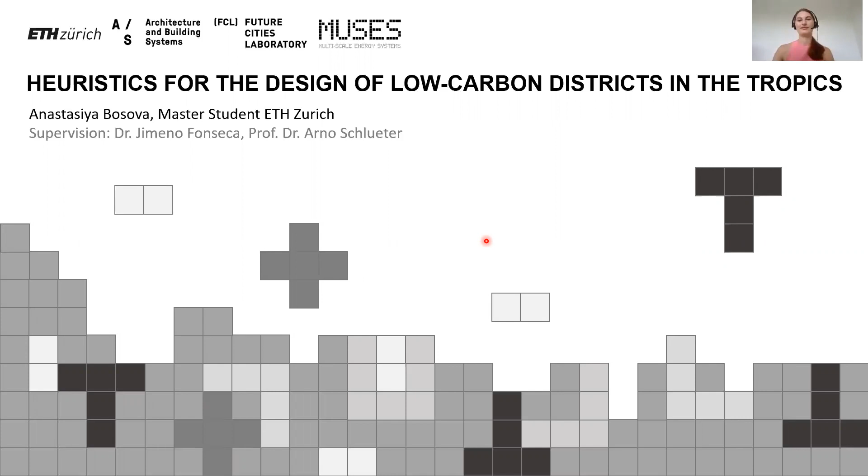In the next 30 to 40 minutes, I will give you a brief introduction into the topic. Then I will address the most important findings of the literature review that helped develop the methodology of the project. Next, I will talk about the methodology of the study, and finally I will show the results, and of course conclude and give an outlook. Afterwards we'll have a discussion and everyone is welcome to ask questions.

So let's begin. I couldn't resist starting with this picture recently shared by Professor Schlueter. He argued that probably a small percentage of the world's population will be affected by COVID, which has gained enormous attention from the global community. Certainly more people will be affected by the upcoming economic crisis, but all of us without exception will be affected by the negative impact of climate change caused by anthropogenic greenhouse gas emissions.

Cities play a big role here. Cities are estimated to cause over 70% of global carbon emissions, and the building sector is responsible for more than half of those. More than 50% of the world's population already lives in cities today, and this percentage is expected to grow to more than 70% in 30 years, with particular growth occurring in the cooling-dominated regions of Asia, such as Singapore.

You can see Singapore in this picture. This is the city center, but actually I can't be sure that this is Singapore because it's the third month of lockdown, but we can assume that.

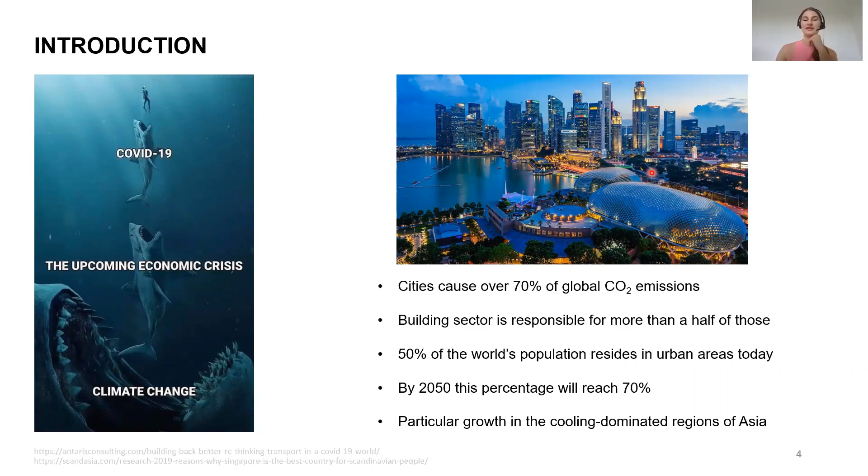So there is a clear challenge of mitigating climate change and sustaining the needs of a growing population at the same time. This is impossible without low-carbon solutions in the building sector, which would aim to reduce its energy use. Despite this emerging need for planning low-carbon cities, urban practitioners are still experiencing a lack of low-carbon design guidelines.

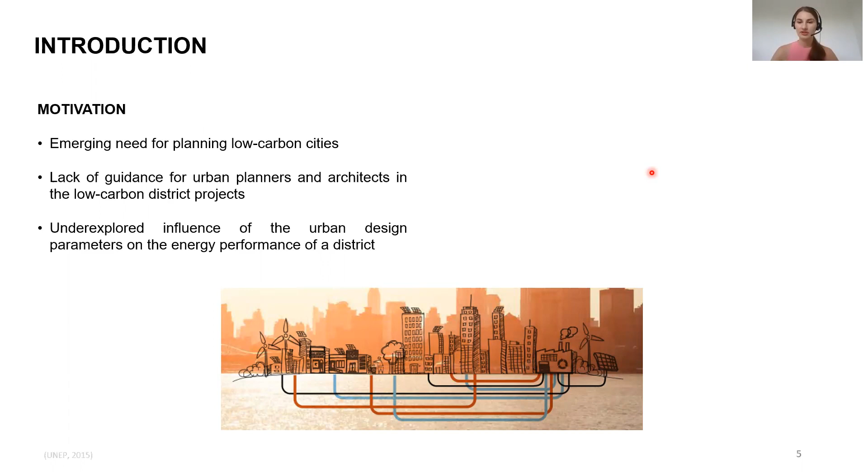It has been argued by various researchers that it would be helpful for urban planners and architects to have guidance at the neighborhood level, or district scale as I will later call it, on which design parameters can potentially influence the energy performance of the urban area. However, the influence of urban design parameters on district energy performance is not sufficiently explored and quantified to come up with comprehensive guidelines.

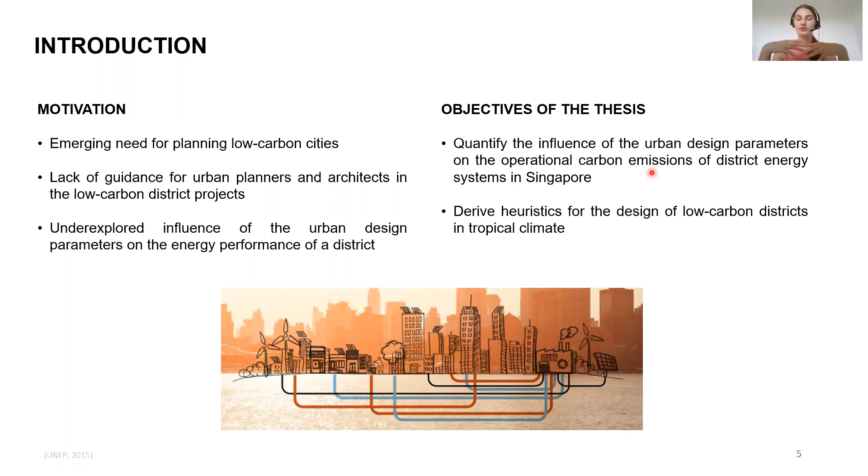So this thesis attempts to fill this knowledge gap by quantifying the influence of urban design parameters on district energy systems in Singapore, more specifically the influence on the operational carbon emissions of the district energy systems. Based on this, the final goal is to derive heuristics, or shortcuts, that would help urban practitioners design low-carbon districts in tropical climates.

So the first step of the thesis was to conduct a literature review. It had two goals. The first goal was to study existing low-carbon or low-energy urban design guidelines, and the second goal was to review energy-driven urban design studies, which explored the interdependence between urban design parameters and energy performance.

Regarding low-carbon urban design guidelines, only a few sources were found, mostly related to China or India. They would introduce general low-carbon strategies such as deployment of renewable energy, use of highly efficient appliances, and so on. So it was rather a vague conceptual level, and it didn't provide clarification on how urban design parameters influence the energy performance of an urban area.

Moreover, urban form was only considered as a factor influencing CO2 emissions associated with the transport sector. There was a concept of transit-oriented development introduced, which recommends concentrating density around transit stations to reduce overall commute. So to conclude, the lack of low-carbon urban design guidelines could be confirmed in the first part of the literature review.

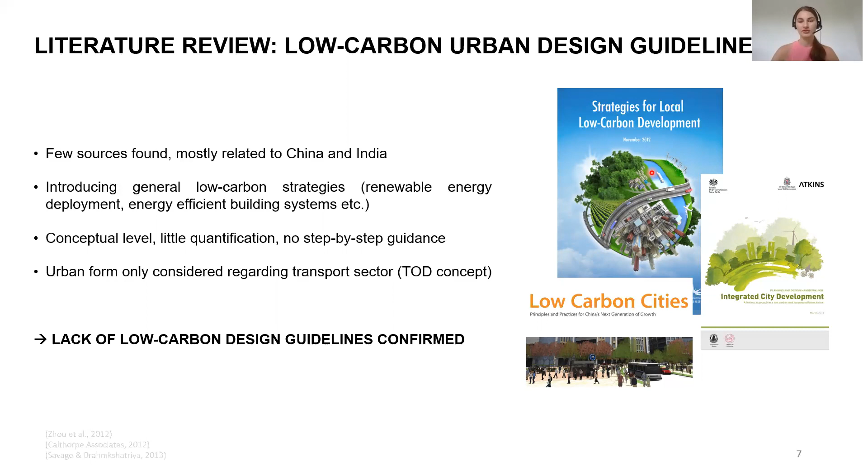The second part of the literature review studied the concepts of energy-driven urban design. Its main approach is to consider interdependencies between energy systems and urban form in order to achieve higher energy performance. A recent paper reviewed 50 energy-driven urban design studies and found design parameters that show higher correlation with energy performance of the building than other parameters.

These include typological parameters such as floor area ratio, orientation, and site coverage, and urban design parameters such as street width and building height.

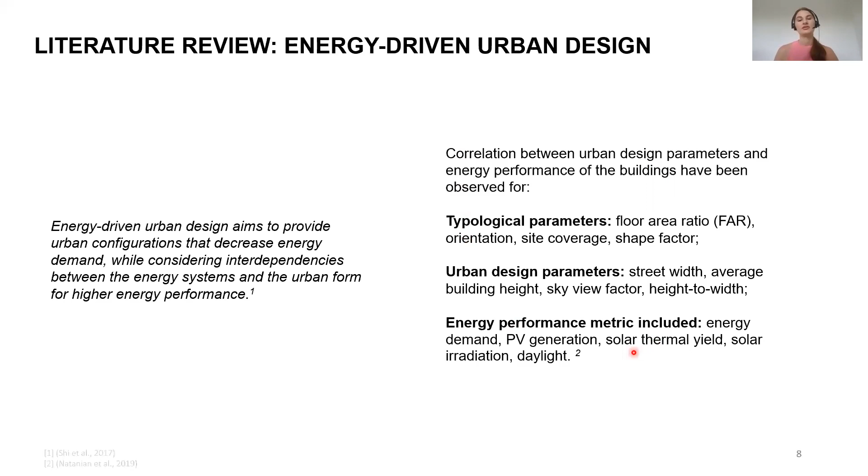These correlations were found for energy performance metrics that comprised energy demand and various solar potential indicators, such as total PV generation or solar radiation on building envelope. So not to be confused, I would like to briefly introduce some of the parameters we're going to talk about a lot today.

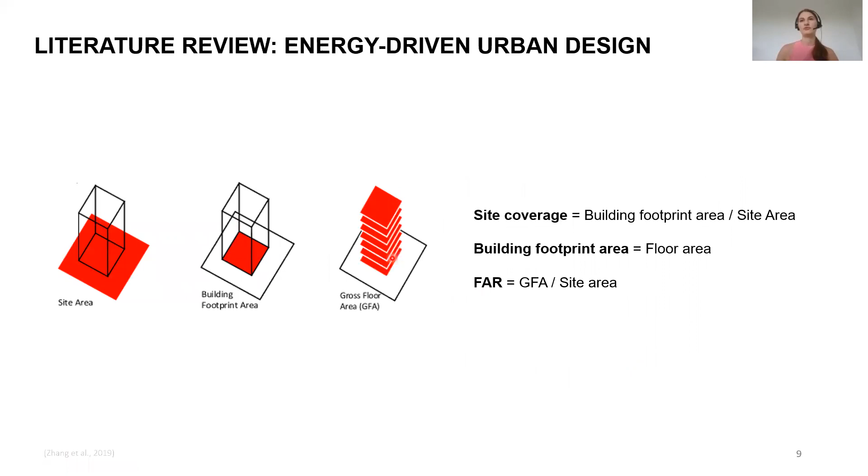These are site coverage, which is the ratio between building footprint area and site area; building footprint area, which is actually equivalent to the floor area; and so-called FAR, floor area ratio, which is a ratio between gross floor area of the building and site area.

So let's move forward to the typological-based energy-driven urban design studies. Often these studies use typological methods to represent and classify urban form. Three types of this method can be distinguished. The simplest one is generic building patterns with repetitive context.

Simply generic forms are used, as you can see in this picture. Target building is the one whose performance is analyzed, and context serves as surroundings to this building. This method, however, struggles to represent the actual built form because it is overly simplified.

The second method uses actual built form of the studied urban area by, for example, exploring GIS data of a city, and this requires big computational effort. Finally, the third method uses hybrid targets with repetitive contexts. Hybrid targets can be vernacular typologies present in the studied area, and the context can be simplified with generic typologies. So this method is a good compromise between the two.

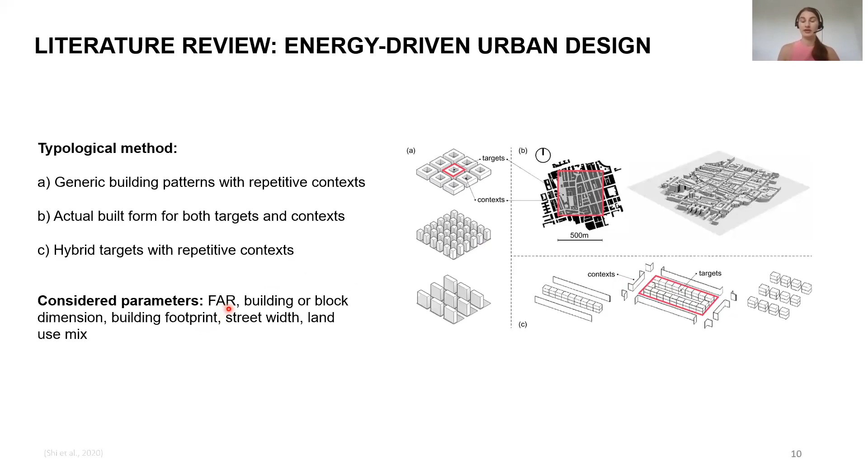In these studies, the design parameters used to describe urban form include floor area ratio, building or block dimensions, building footprint, street widths, and land use mix.

Here are some examples of the way researchers apply the typological method. On the left side, a Singapore-based study by my colleague Zhong Ming is presented. He used generic patterns as a starting point, then verified them for the Singaporean context and came up with various block typologies relevant for Singapore. For example, a block would comprise a combination of podium with a tower. The aim of the study was to estimate PV potential of each block typology.

On the right side, a study is shown that is also based in tropical climate, but in China. These typologies were retrieved by studying urban form of the city of Macau, including courtyard, pedestal, cross, and so on. The result of this study was to prove that one of the typologies, set back, maximizes solar accessibility, and also pedestal, court, and triangle perform quite well.

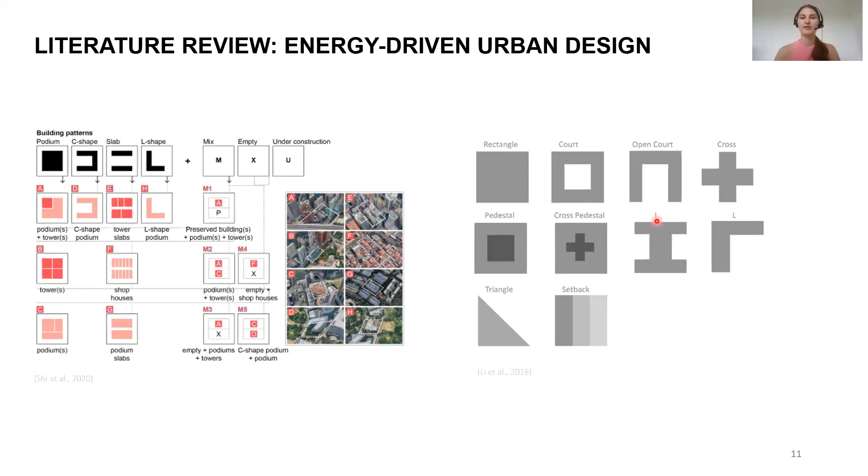These are the final studies that I would like to share with you. Some of the Singapore-based studies, not necessarily the ones using typological method, could actually quantify the relationship between studied urban design parameters and performance metric.

Here we can see what I mean by quantifying a relationship. It is to make a clear statement how a change of a design parameter would influence a performance metric. For example, to increase renewable energy share from 20 to 70%, FAR should decrease from 32 to 3 with purely residential land use.

Another example is here: hybrid and courtyard typologies have twice the rooftop PV potential, as well as twice higher reduction in CO2 emissions than other typologies used in this study, as shown here. These are examples of a good outcome one can expect to get out of energy-driven urban design studies in order to derive some heuristics. Hopefully we can hear something similar later in the results section.

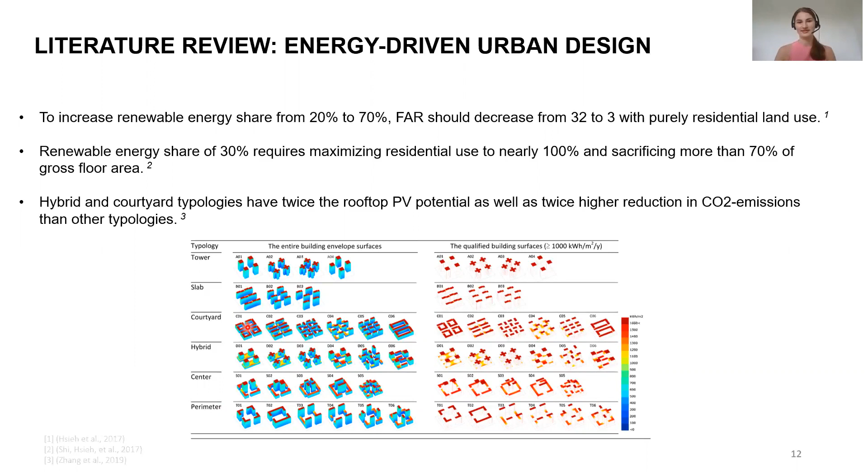Now that we have some background from the literature review, next I'd like to talk about the methodology of the current study. First of all, to describe urban form, a typological method was used. As block typologies lead to a large amount of design combinations, it is difficult to interpret the results, and sophisticated parametric tools are needed to generate the designs.

That's why this study chose building level as a typology unit, to gain more control over the modeling and interpretation of results. The building typologies from Macau shown earlier in the literature review were used as a starting point.

They were verified for the Singaporean context by studying building footprints in high-density areas of the city. As you can see, these typologies appeared to be present in Singapore, and 12 of them in total were adopted by this study, including square, courtyard, slab, C-shape, L-shape, and so on.

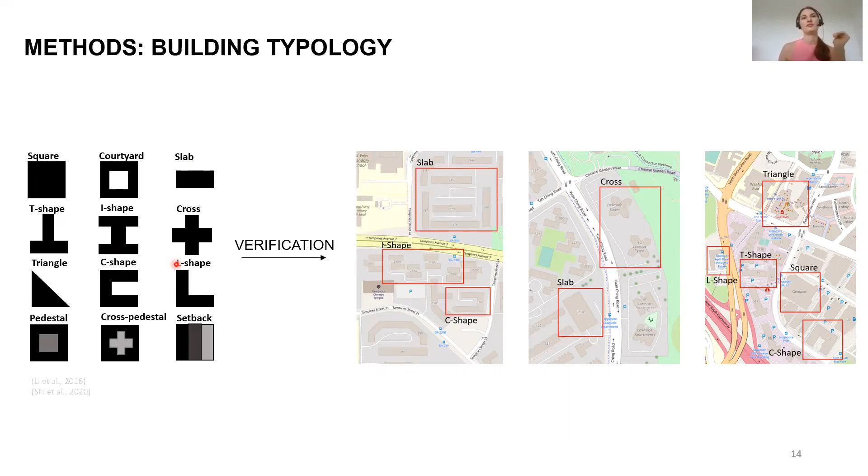To describe these typologies, the most relevant parameters in context of energy-driven urban design were chosen. According to the literature review, this includes density, expressed as floor area ratio, street width as a compactness indicator, and land use mix. The ranges for the parameters were defined based on the Singaporean context, and a mixed-use high-density setting was assumed.

There is a minimum FAR of 4 and maximum FAR of 24, 3 typical street width categories for Singapore, and 36 different land use mixes, including residential, office, and retail use. These land use mixes were grouped into 9 categories to simplify interpretation of results.

Given these parameters, a scenario parameter matrix was constructed, meaning that for every typology, each possible combination of design parameters was tested. For example, square typology was 60% residential use, 30% retail, 10% office, with FAR of 4 and street width of 15. The total number of scenarios reached more than 9,000.

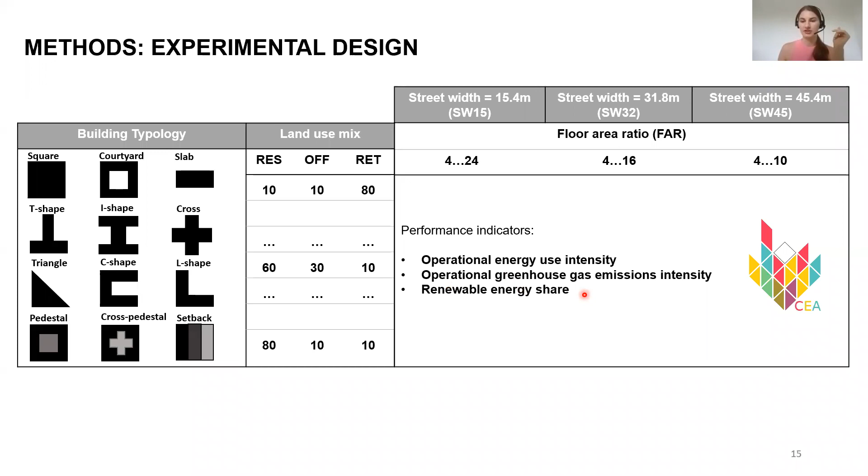The performance indicators for the scenarios included operational CO2 emissions, energy use, both absolute and relative values, and renewable energy share. As for supply systems, given the goal of low carbon performance, a constant set of well-performing technologies was chosen, including district cooling and photovoltaic panels installed on roofs and facades, with a threshold of 400 kilowatt hours per square meter per year. The rest of demand is assumed to be supplied from grid electricity, assuming the Singaporean mix.

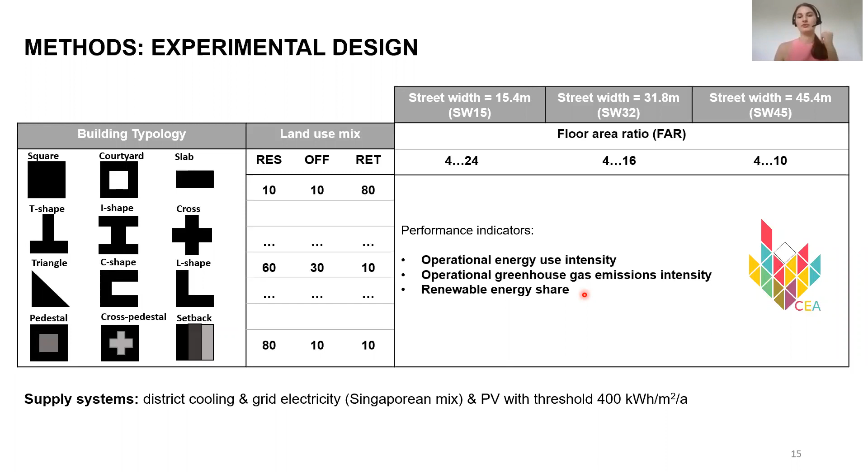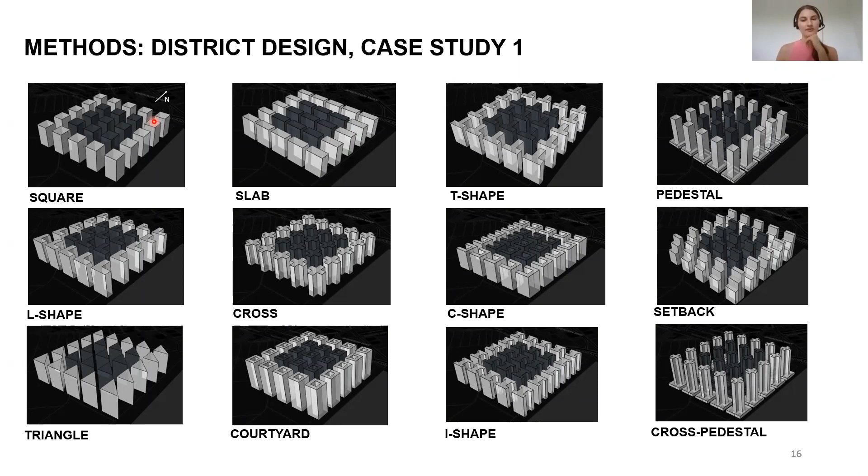The buildings are oriented to reduce solar exposure of the facade facing east-west direction, which is common practice in Singapore. Further, constant site coverage and site area were assumed: site coverage was 45% and site area of 100 by 100 meters.

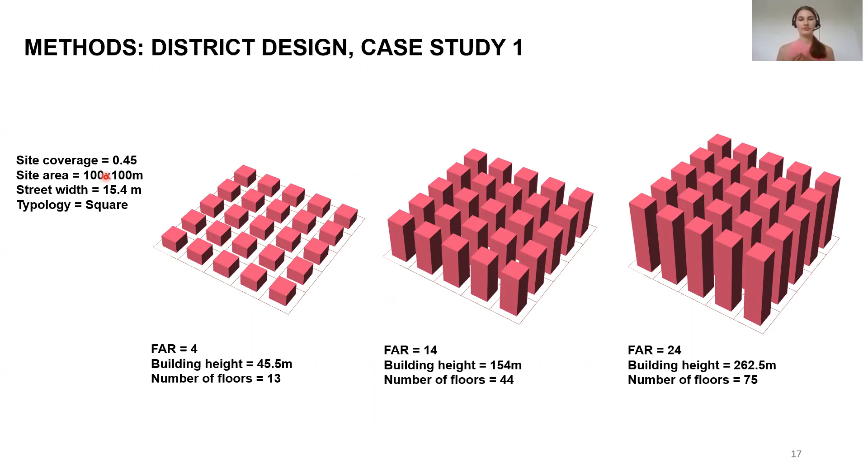If we keep street width constant but increase FAR from 4 to 14 to 24, given constant site coverage and constant site area, the building height should become larger. So the building grows, but footprint area stays the same. It is also assumed that the height profile of a district is homogeneous in this case study.

Next, if we keep FAR constant and increase street width under constant site area, the building footprint has to get smaller, and to achieve the same FAR with larger street widths, building height should also increase, which happens from left to right. In terms of compactness of urban form, a district with larger street widths would be less compact than one with smaller street widths, so street width in our case is an indicator of compactness.

Since larger street width means higher buildings, maximum achievable floor area ratio is different for street width of 45 compared to street width of 15, given a certain height limit. If maximum achievable FAR for street width 15 is 24, for street width 45 it is only 10.

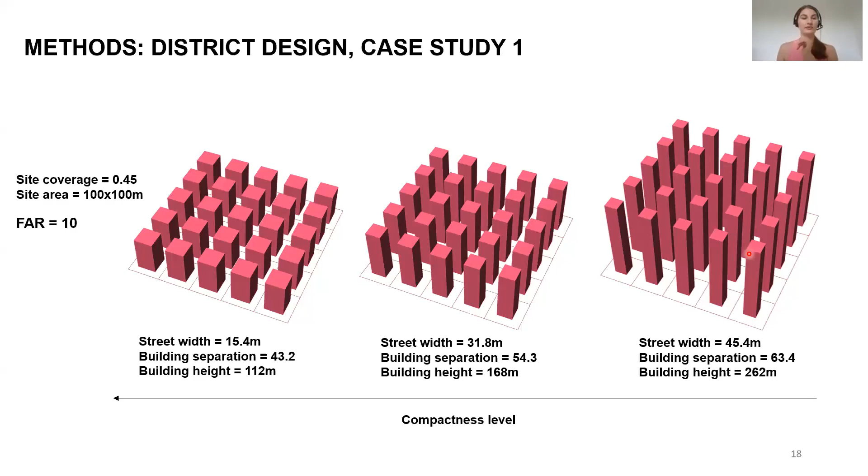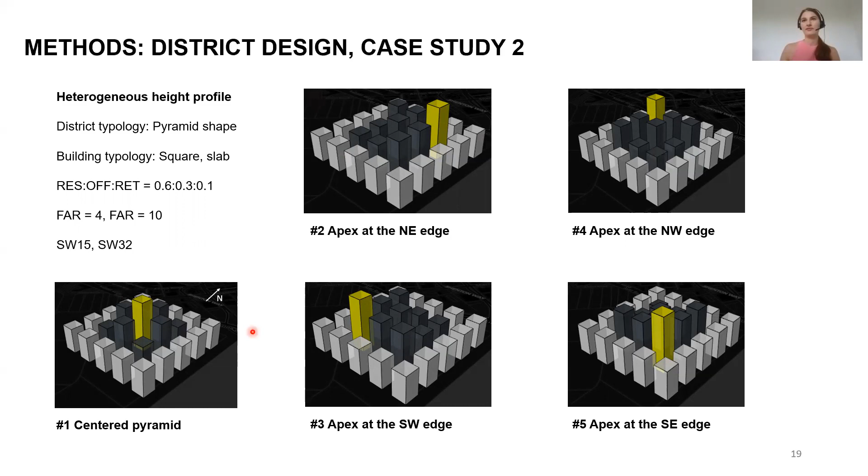The first 5 height profiles shown in this picture are inspired by the idea of transit-oriented development, which leads to a pyramid district shape with density concentrated at a certain location. The apex of the pyramid with the highest FAR can be located either in the center or at the edge of the district, giving 5 designs with different orientations.

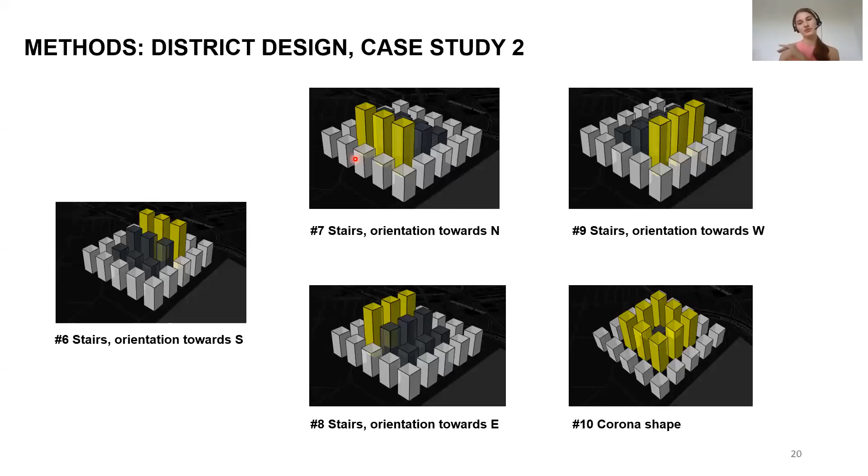Additionally, height profiles such as stairs and corona shape that have been used previously in the literature were explored. Stairs shape can be used in urban design to maximize views on one side of the district, for example if it faces a river or sea. Corona shape contains a smaller building at the center of the district surrounded by higher buildings, which can occur if the building in the center has a different use, such as a restaurant or school. The surroundings in this case study were assumed to be of homogeneous heights for all district designs.

In the final case study, the assumption of constant site coverage was challenged. Except for 45% site coverage, additionally 70% and 90% site coverage were investigated.

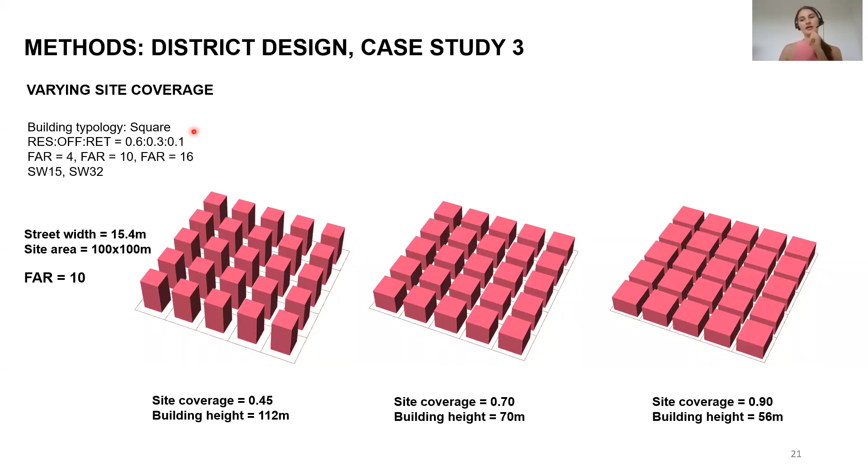Also here, a reduced number of scenarios was considered. A single typology of square was tested, 3 densities from 4 to 16, 2 street widths, and a single land use, same as in the previous case study. So the total number of scenarios reached 18.

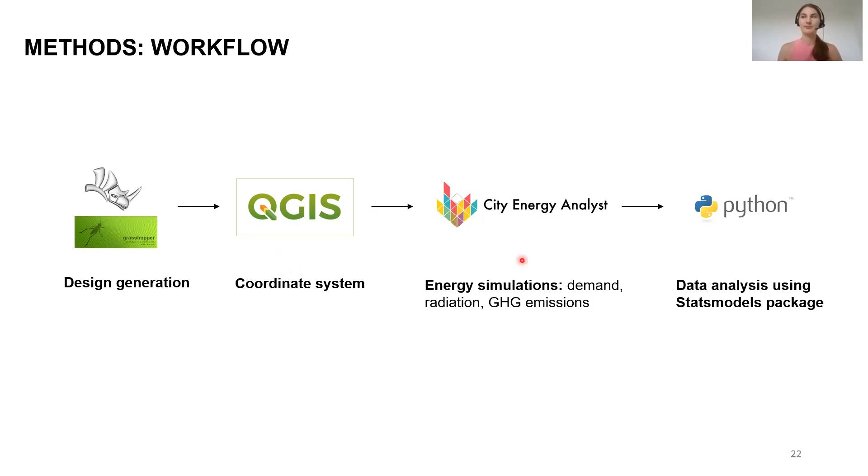To obtain the results, the following workflow with various tools was created. District typologies were generated in Rhinoceros with help of Grasshopper, then enriched by coordinate system in QGIS. Energy simulations were conducted with help of City Energy Analyst, and finally statistical analysis of data was done with the Statsmodels package in Python.

As for the statistical analysis, first ANOVA technique was used, analysis of variance. It is a hypothesis test that helps explore the relationship between factor variables and performance indicators. In our case, a factor variable is building typology, consisting of levels such as square, slab, and so on. One-way ANOVA helps determine whether the average CO2 performance differs for at least one typology among all considered levels. The null hypothesis, meaning that means of levels are equal, is rejected if the p-value is smaller than 0.05.

Two-way ANOVA additionally studies interactions between two factor variables, for example the interaction of typology and FAR with respect to energy use intensity. Let's say for one typology, an increase of FAR would mean lower energy use intensity, and for another typology, higher. Then the null hypothesis would be rejected by two-way ANOVA.

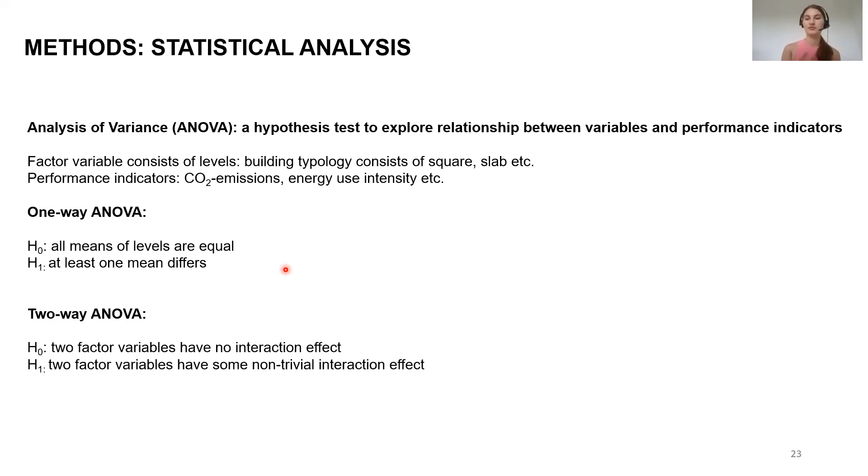Next statistical analysis technique was linear regression. It was used to approximate and quantify the relationship between input variables and performance indicators. A regression model of linear form was used, where typology, FAR, and so on are independent variables, and the aim is to estimate the unknown coefficients in order to predict performance indicators based on the input variables.

The estimated coefficients can be interpreted relative to a baseline scenario. For example, regression coefficients can be used to estimate the effect of an increase in the proportion of retail area on the carbon performance of the district relative to the baseline.

And now we're finally coming to the results section. To get a big overview, let's start with one-way ANOVA. I'm going to address each input variable - land use mix, typology, FAR, and street widths - considering various performance indicators. The results I'm sharing will be filtered for maximum FAR of 10 to use an equal number of observations for each street width category. Also, some typologies such as pedestal, cross pedestal, and setback will be excluded since they follow different logic in terms of maximum achievable density for each street category.

So let's start with land use mix and energy use. The null hypothesis is rejected for both absolute and relative energy use, meaning there is substantial variability in results for different land use mixes. We can see that land use mixes with a retail component have the highest energy use, while residential-dominated uses have the lowest, as expected. Balanced scenarios offer a good compromise between these extreme cases. If we consider the Singaporean standard for super low energy buildings and take the benchmark value for offices of 114 kilowatt hours per square meter per year, none of the scenarios with office use would satisfy this benchmark.

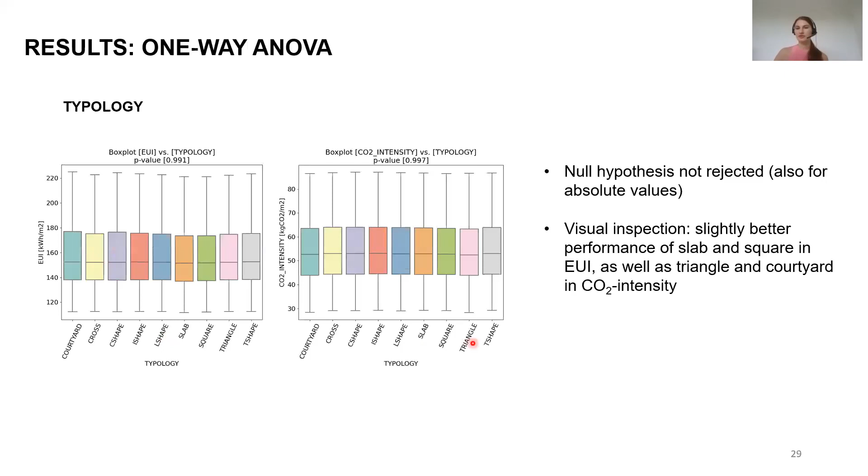Next, let's look at typology. For energy use intensity and CO2 intensity, the null hypothesis was not rejected, meaning there is no substantial variability between different typologies - this was also true for absolute values of these indicators. However, by visual inspection, we can see slightly better performance of slab and square in energy use intensity, as well as triangle and courtyard in CO2 intensity. Only for renewable energy share and PV potential was the null hypothesis rejected, suggesting inequality of means for different typologies. The highest PV potential and renewable energy share was reached for courtyard, triangle, and square.

On average, it was 9% of renewable energy share. This percentage is too low to create substantial PV-induced variability in other performance indicators. That's why we didn't see similar behavior of the CO2 performance.

If we consider FAR, as expected, the null hypothesis was rejected for energy use and energy use intensity. We observe increase of energy use with FAR, since the gross floor area also increases, and a light decrease of energy use intensity. Moreover, the step change is larger for smaller FAR.

If we look at the step change between 4 and 6, versus for bigger FAR, the step change between 8 and 10, I suppose the reason for it is increased mutual shading, because the ratio of shaded area is larger if buildings get higher with larger FAR. This decreases solar exposure of the facades and therefore cooling demand.

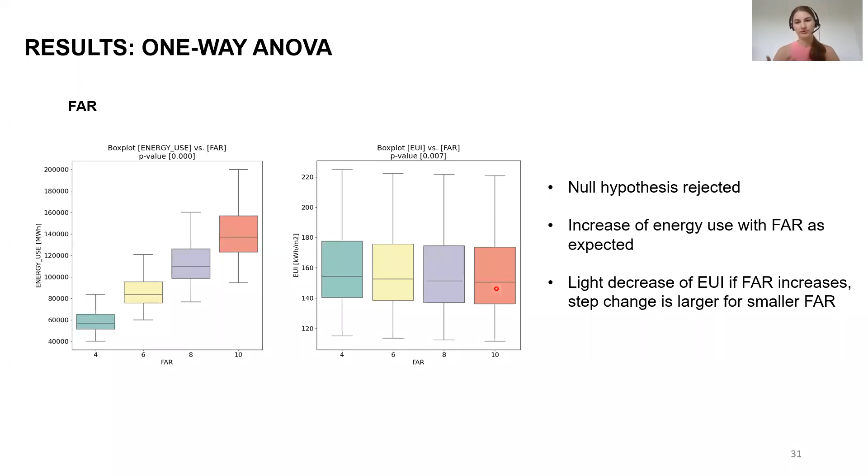The rate of change in renewable energy share is again not constant across different FAR, showing a larger decrease between 4 and 6 than between 8 and 10. Smaller PV potential for larger FAR also indicates that most likely the mutual shading is enhanced, so it decreases solar exposure of the facades and negatively affects PV potential on the facades, but reduces energy use.

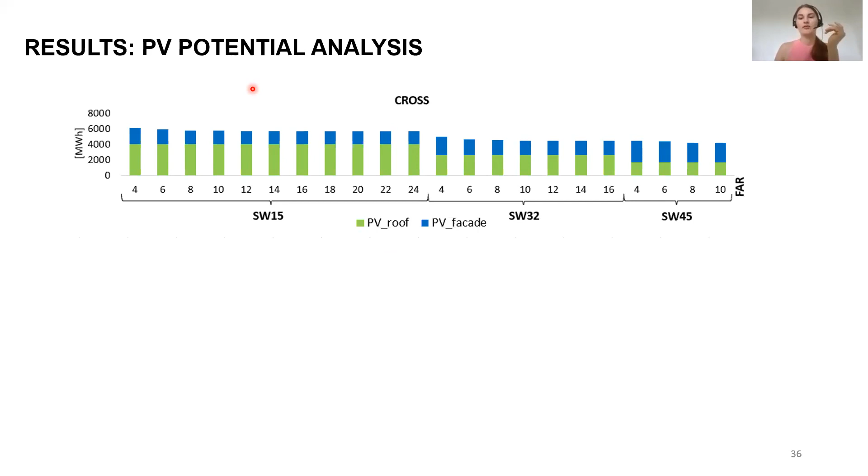Also, we notice that the roof potential is constant within a street category. Change in FAR only causes a change in facade production, which slightly decreases for bigger FAR. Roof potential is higher for smaller street widths, because footprint area and therefore roof area are larger. While roof potential decreases, facade potential grows for wider streets since mutual shading of the building reduces.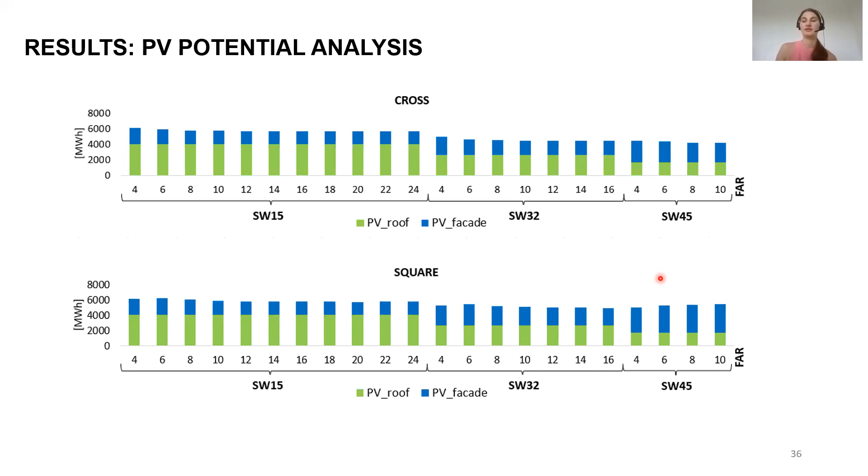If we compare the PV breakdown of cross and square typologies, we notice some differences for large street widths. In case of cross, facade production actually decreases with FAR, but rises in case of square. These kinds of occurrences are not captured by one-way ANOVA, so to address them, two-way ANOVA that considers two factors simultaneously should be used.

Here are the results of two-way ANOVA for PV potential versus typology grouped by street widths. The null hypothesis was rejected, suggesting an interaction effect between street widths and typologies. All typologies except for slab and square follow a similar pattern: wider street widths mean lower PV potential.

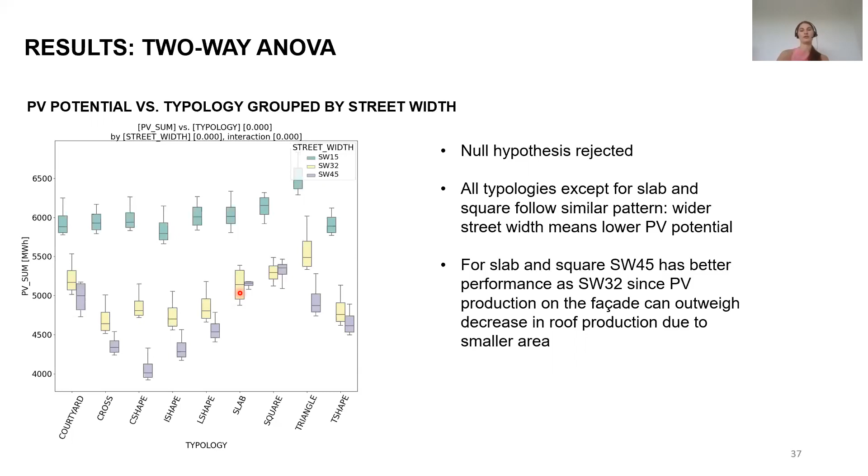But for slab and square, street width of 45 actually has better performance than street width of 32. Apparently, PV production on the facade for these typologies can outweigh the decrease in roof production due to smaller roof area. Two-way ANOVA was conducted for other cases as well, and the majority either didn't reject the null hypothesis or the trends shown in one-way ANOVA remain constant, so we will not address it further. Let's move forward.

In the previous analysis, we noticed that there exists very little variability of the performance indicators unless we talk about the influence of land use.

The variabilities arising from geometry-related parameters such as street widths or FAR would mostly be caused by differences in the PV potential.

So the question is, if we assume maximum existing PV cell efficiency of 45%, which is quite future-oriented and almost 3 times higher than the current cell efficiency, how will it change the results?

So we conclude that total PV production is still too small compared to energy use.

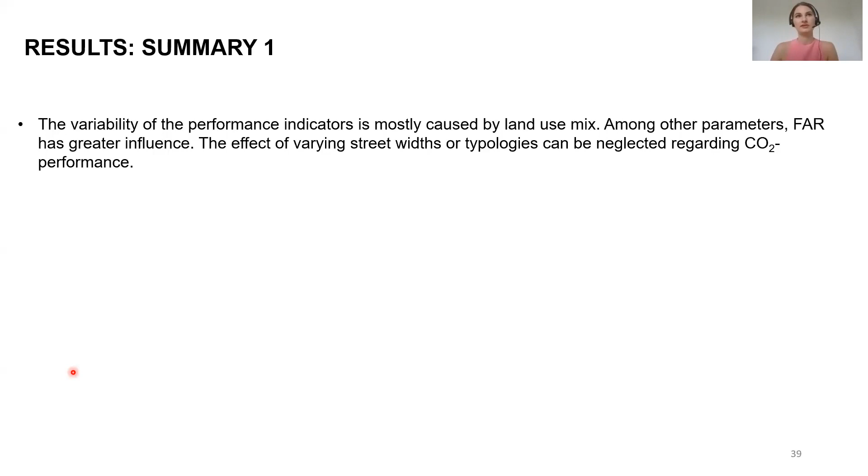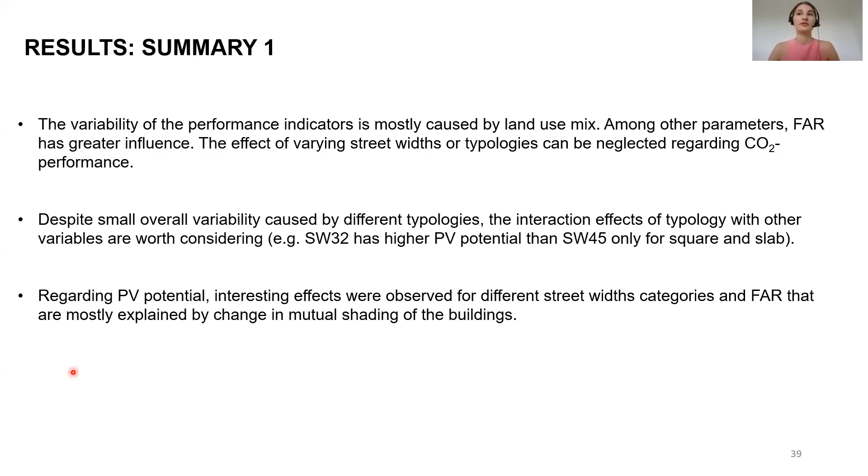Despite small overall variability caused by different typologies, the interaction effects of typologies with other variables are worth considering. For example, street width of 32 has higher PV potential than street width of 45, but only for square and slab. Regarding PV potential, interesting effects were observed for different street width categories and FAR that are mostly explained by change in mutual shading of the buildings.

Finally, PV potential and therefore renewable energy share are too small to project the variability of PV potential on the performance indicators. Even a triple increase of PV cell efficiency would reduce CO2 intensity only by 25%.

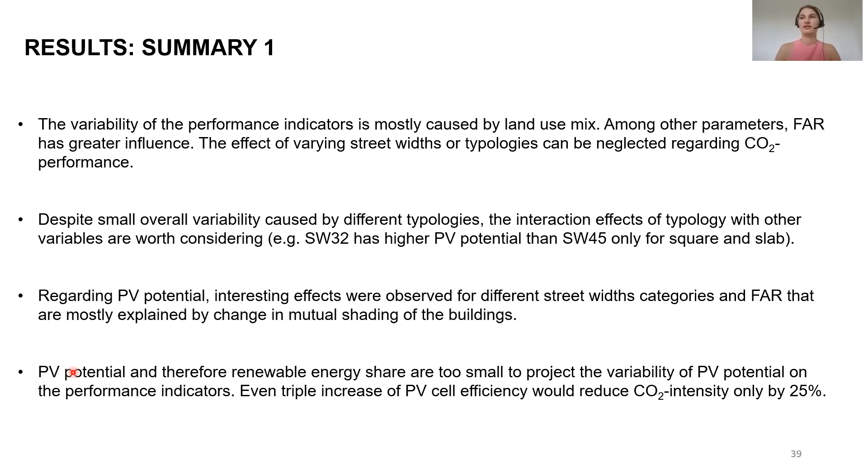Now I would like to share with you the outcome of the regression model, which is a table on the right that can be created for every performance indicator. In this case it represents CO2 intensity given the following baseline scenario: square typology, FAR of 4, street width 15, and balanced land use. We are mostly interested in these coefficients.

Coefficients with low standard error values and p-values close to 0 can be thought of as important and contributing to the explanatory power of the model, which is not the case for the typologies. The rest of the parameters have p-values of 0.

So I will give you an example of how this table can be read. If one wants to know how CO2 intensity would change if land use changes to office with residential and FAR is increased to 10, then it would be necessary to sum up coefficients with baseline. And this is the result that one would get.

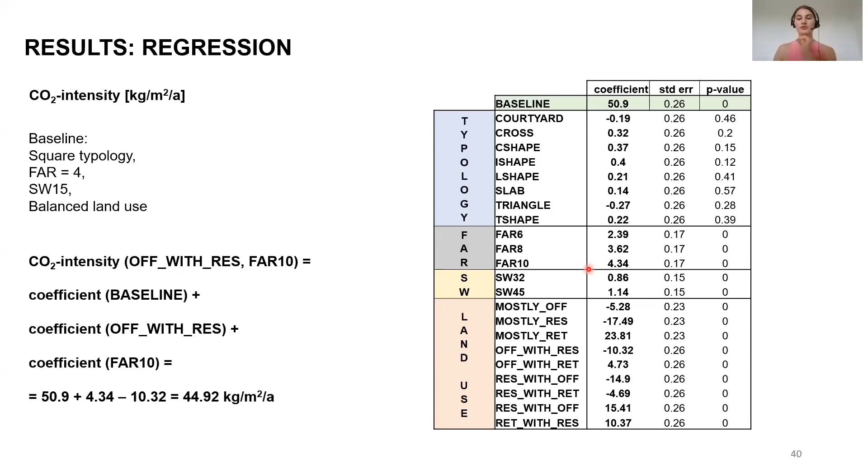Looking at the coefficients closer, one can spot some trends that we discussed previously, for example that the trade-off between FAR of 4 and 6 is larger than the trade-off between FAR 8 and 10. So both statistical approaches, ANOVA and regression, support each other's findings.

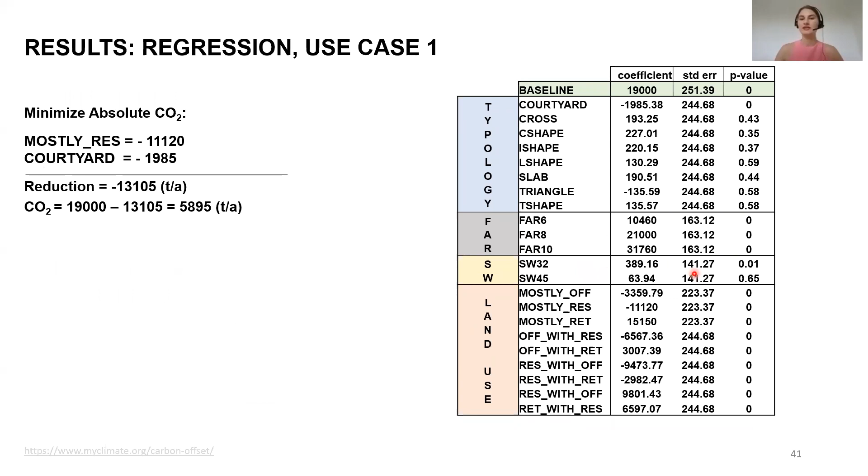Another example can be made with respect to absolute CO2 emissions. If the goal is to minimize CO2 emissions, then we should go for courtyard typology and mostly residential mix, resulting in a 13,000 ton reduction of CO2.

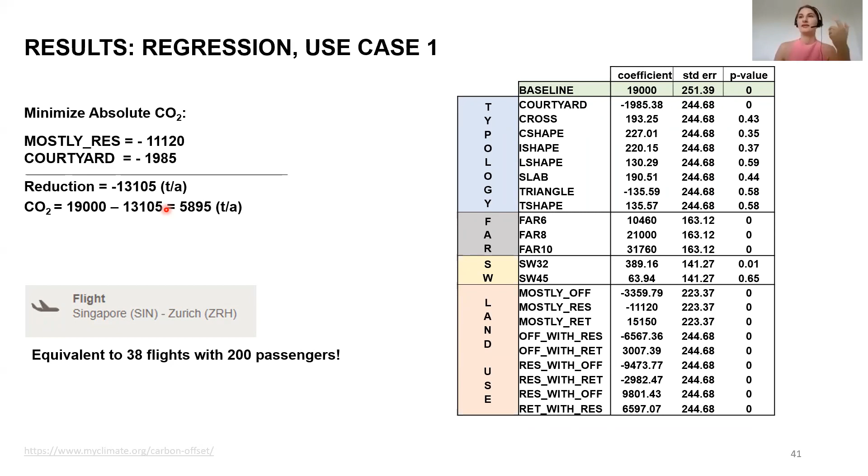To make this value tangible, let's compare it with something many of us have experienced, namely a flight from Singapore to Zurich. So 13,000 tons of CO2 would be equivalent to 38 one-way flights with 200 passengers. This is what we would save by such a design decision.

Also, these regression tables can be used for benchmarking purposes. For example, if one wants to minimize energy use intensity and achieve some good points from the construction authorities, then given the baseline, one could look at the possible reduction of the value.

And for example, in Singapore, the Building and Construction Authority says that you need to have 135 kilowatt hours per square meter to be in the top 10% of mixed development, so mixed land use mix.

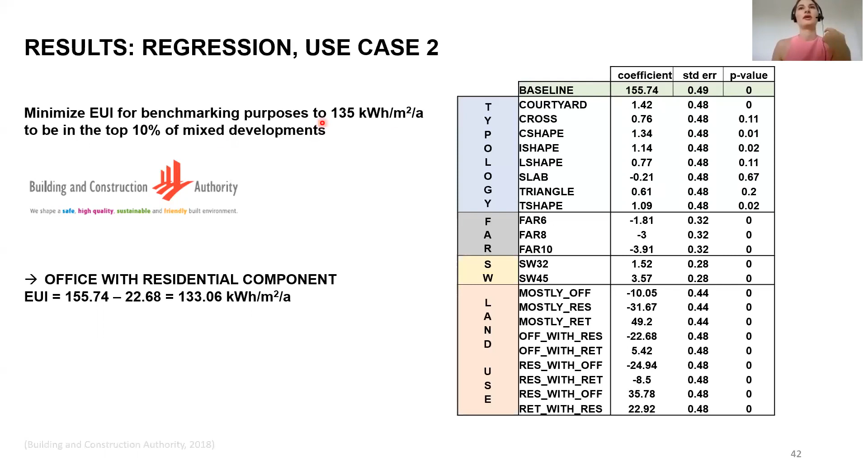To achieve that, we would need to introduce the office component compared to the baseline, and then the benchmark of 135 could be achieved. So let's summarize.

The regression model allows us to quantify the impact of parameter change on the performance indicator, and the trends analyzed with ANOVA are also present in the regression model. The findings are supported by both models. The regression model can be used for benchmarking purposes, to estimate performance of certain combinations of design parameters and compare different options, which is heuristics.

So the previous analysis was only for the first case study, exploring the scenario parameter matrix. But as you remember, there were also two case studies challenging the assumptions of the first case study. Case study two assumed a heterogeneous height profile of a district instead of homogeneous. And here are the results.

The null hypothesis was not rejected in all performance indicators except for PV, so there are no substantial differences between different height profiles. The energy use was also nearly identical in all cases.

However, some designs lead to higher PV potential, such as the stairs-oriented shape towards east and the corona shape, which are these box plots. They have larger PV potential on the facade, which is why the total PV potential is higher. So we can spot small differences in CO2 intensity for these height profiles too. They perform slightly better based on visual inspection.

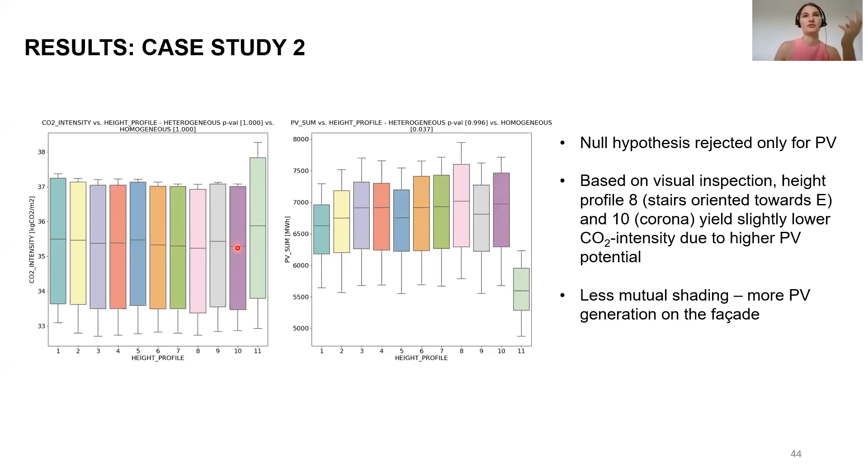As for the final case study with varying site coverage, ANOVA didn't reject the null hypothesis despite visual differences we can spot here. Perhaps it's due to the small number of observations, which is 18. So we noticed that higher site coverage leads to reduction of CO2 intensity because PV potential increases. The reason for that is an increase in roof area that is twice as big for 90% site coverage than for 45% site coverage.

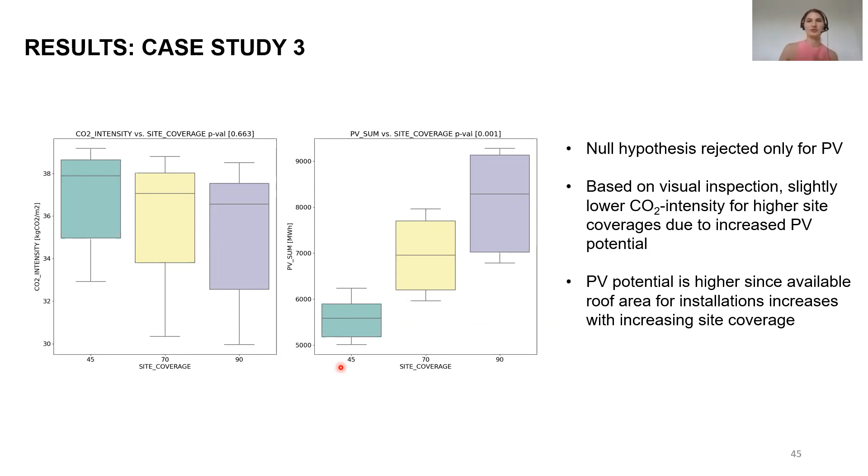However, we do not observe doubled PV production, since increase in site coverage reduces PV potential on the facade. So roof potential increases, but facade potential decreases for larger site coverage.

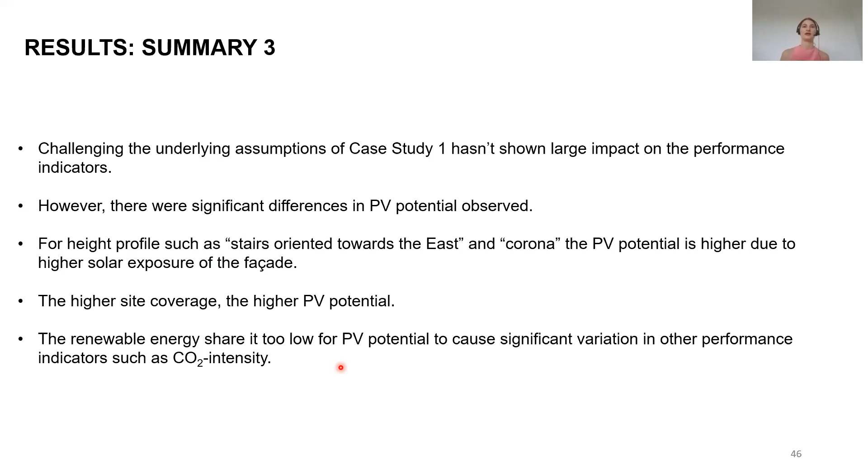So challenging the underlying assumptions of case study one hasn't actually shown a large impact on the performance indicators. However, there were significant differences in PV potential observed. But still, the renewable energy share is too low for PV potential to cause significant variation in other performance indicators, such as CO2 intensity. And now we have slowly arrived at the conclusion.

First, let's address the conclusions related to the design parameters. The most impactful design parameter is land use mix. The impact of FAR is much smaller, but statistically significant. In some cases, the impact of street width is statistically significant too, while typologies do not cause significant variation.

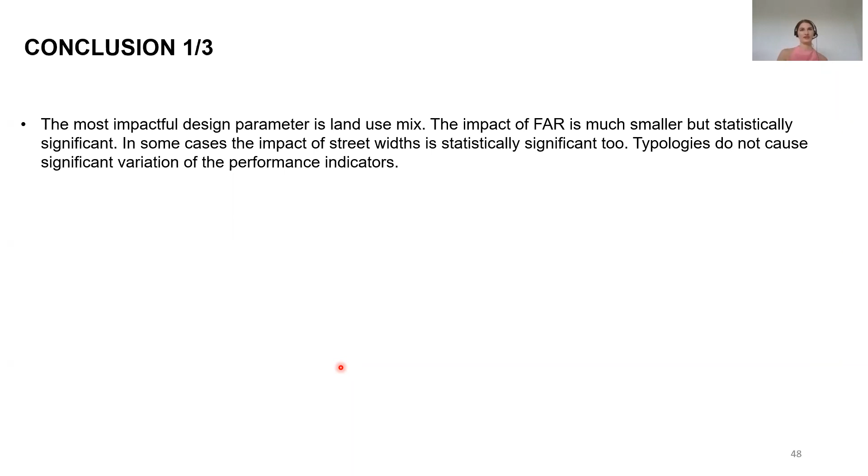The lowest CO2 intensity of 33 kilograms CO2 per square meter can be achieved with mostly residential land use mix, street widths of 15, FAR of 4, and triangle typology. CO2 intensity is largely determined by energy use, which is influenced by land use mix.

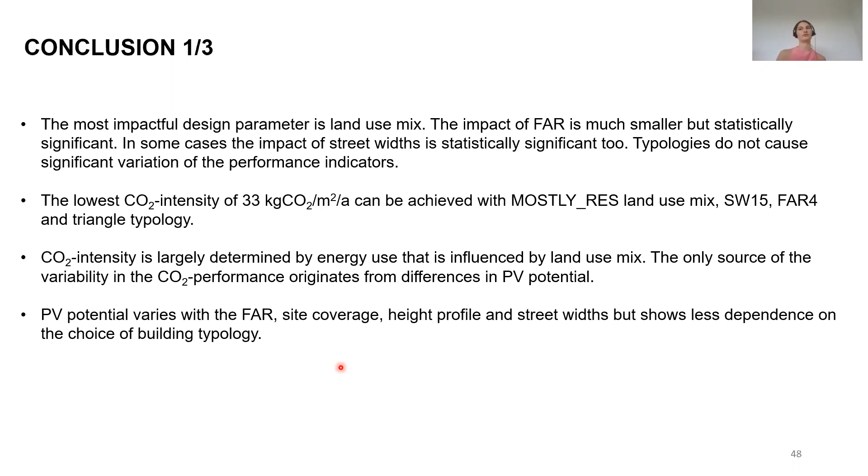The only source of variability in the CO2 performance originates from differences in PV potential. PV potential varies with FAR, site coverage, height profile, and street width, but shows less dependence on the choice of building typology. And renewable energy share is too low to observe PV-induced variability in other performance indicators such as CO2 intensity.

To increase renewable energy share, change on a bigger scale should happen, namely reduction of CO2 intensity of the Singaporean electricity grid. So only a multi-scale approach can lead to low carbon districts and buildings, because the potential of urban form alone to influence carbon performance is limited.

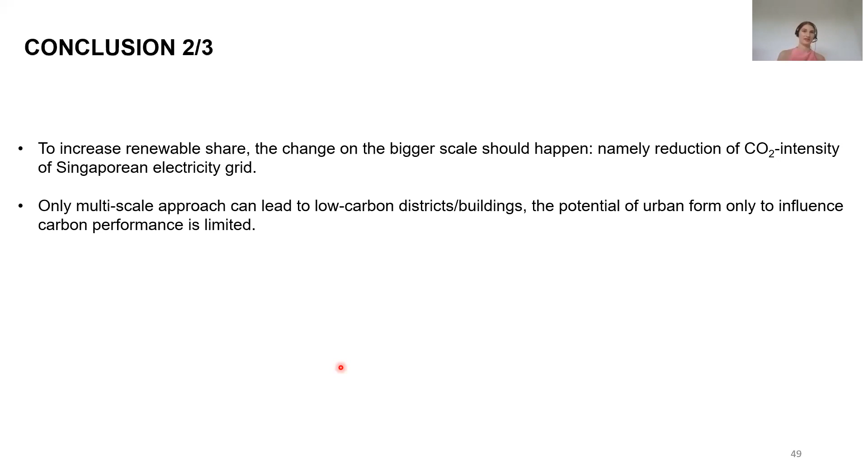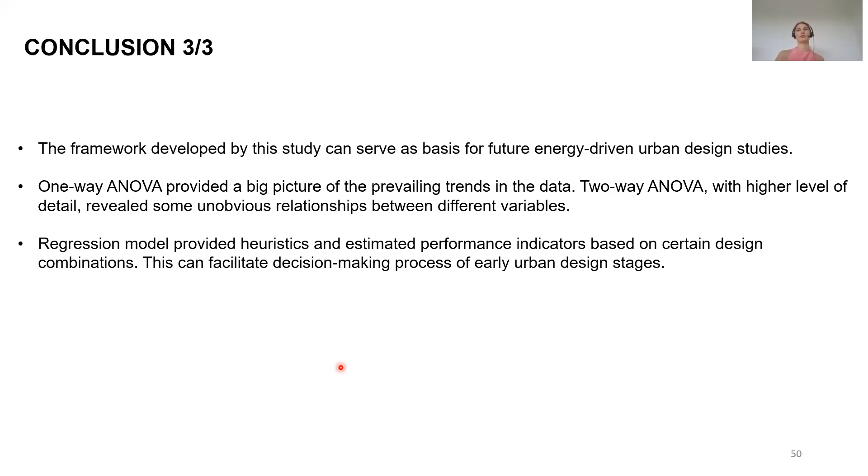And finally, I would like to give you an outlook on how this study can be further refined. More realistic urban settings should be considered by using parametric design techniques, and it should account for hybrid block typologies. The final case studies should be carried out according to the full scenario matrix in order to incorporate height profile and site coverage into the regression model.

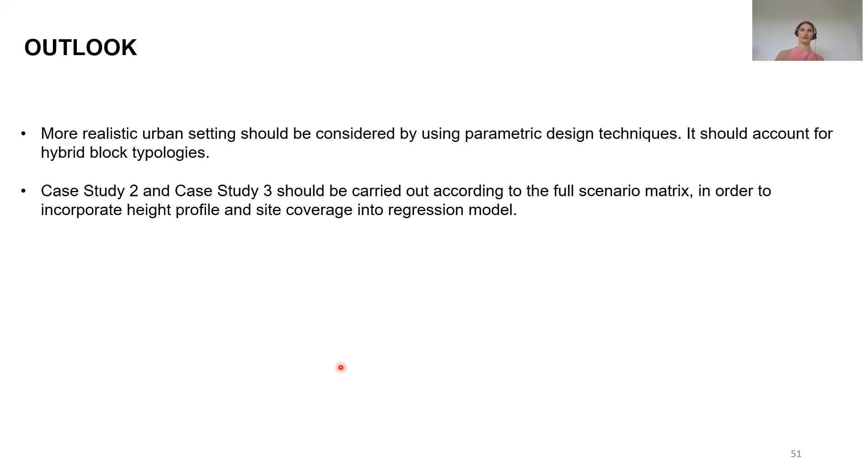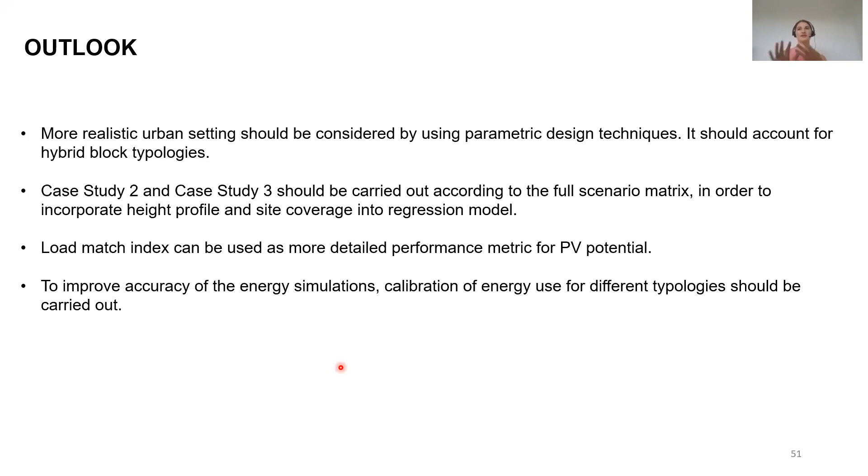Also, a load match index can be used as a more detailed performance metric for PV potential, not just the annual PV generated electricity. To improve accuracy of the energy simulations, calibration of energy use for different typologies should be carried out.

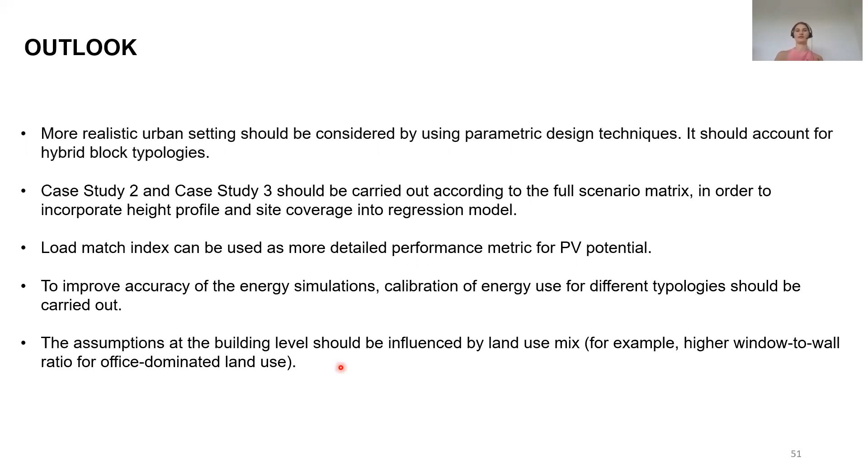And finally, the assumptions at the building level should be influenced by land use mix, for example, a higher window-to-wall ratio for office-dominated land use. Then the results of the study can be refined.

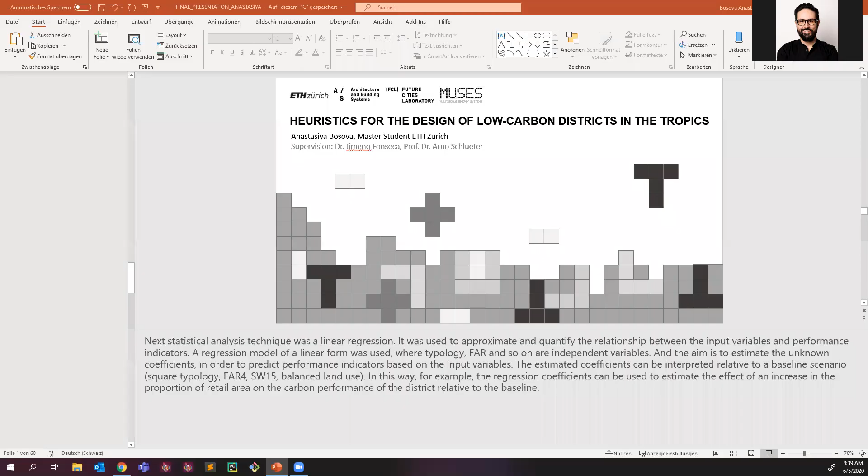All right, thank you very much, Anastasiya. That was a great intake of information regarding urban form and energy systems, optimization and performance. Thank you very much for that. Maybe I can start off with some questions regarding the results you obtained.

So in slides 30 to 50, I believe, you started describing all the box plots, which basically represent probability distributions of the impact of one variable against another, right? And I wonder if you have some intuition about what we can see in the extremes of those plots, on the third quartile and the first quartile, as well as the fourth quartile.

Interesting question, thank you. So we can start by looking at the renewable energy share compared with FAR. We know that for higher energy demand caused by land use mixes with a high retail component, or also high office component compared to residential mixes, we get less renewable energy share. So here, for example, 8% renewable share for FAR of 4, there will likely be a land use mix with the highest retail component. Also, most likely, the highest street width of 45, because we've seen that street width of 15 performs better in terms of renewable energy share. And at the top points, there will always be a land use mix that contains mostly a residential component, with street width of 15.

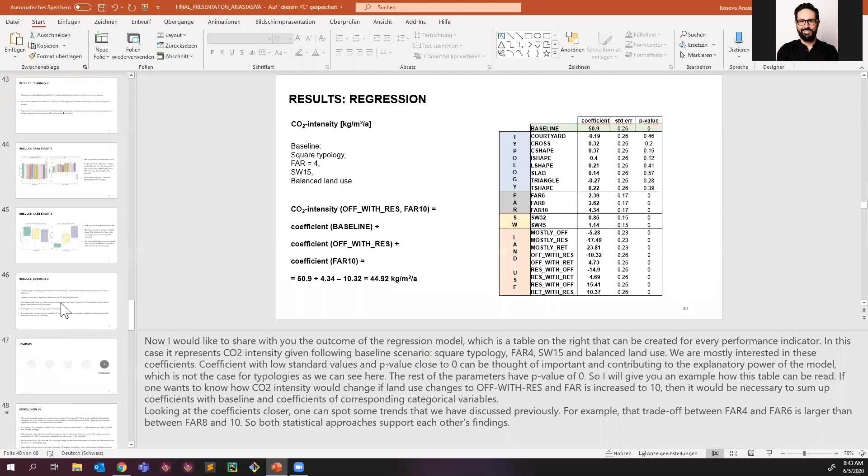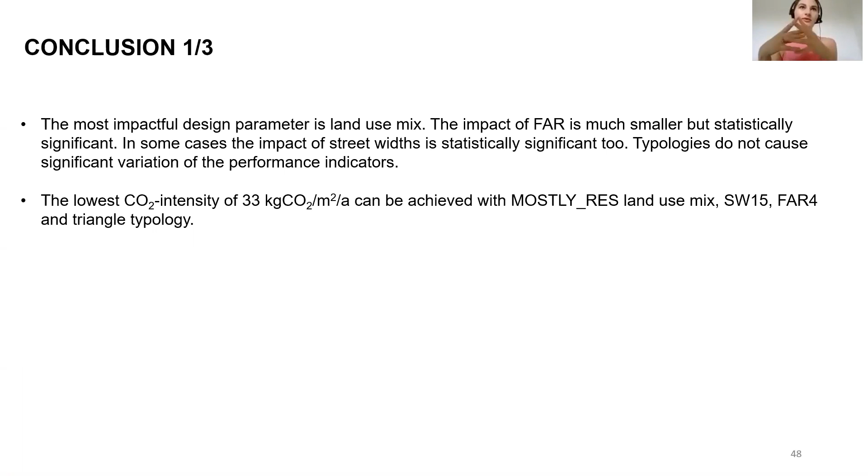Yeah, sure. So we know there are always trade-offs, so it's difficult to say what is the best performing solution. But as I stated in the conclusion, the best performing scenario would be the one with mostly residential land use mix, street width of 15, FAR of 4, and triangle typology. So the lower the FAR, the better, the lower the street width, the better. And we've already talked a lot about the land use mixes.

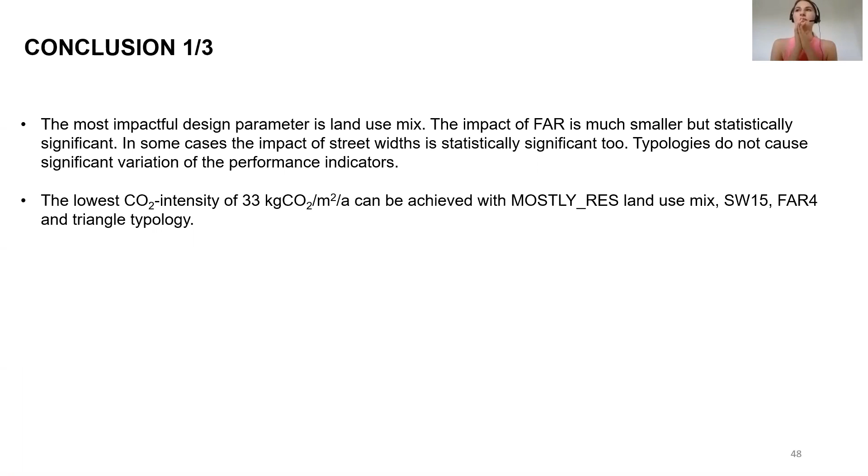But in general, if we move to the bigger picture of this study, I'd say I was slightly disappointed that the impact of the urban design parameters considered in the scenario parameter matrix was less than expected. So achieving low carbon performance by only considering and optimizing these design parameters is not sufficient. That's why a multi-scale approach is needed, because largely the buildings are supplied by electricity from the grid. If the Singaporean grid were more similar to the Swiss grid, which has a very high renewable energy share, then the differences from these urban design parameters shown in this study would become more significant and more visible.

And now if we speak about priorities, of course change should happen simultaneously on different scales. But if we just speak about low carbon performance, the biggest impact would be to change the way the power system is designed—if we speak about Singapore, to change the electricity mix. Then it would be much easier to achieve low carbon performance in the designs.

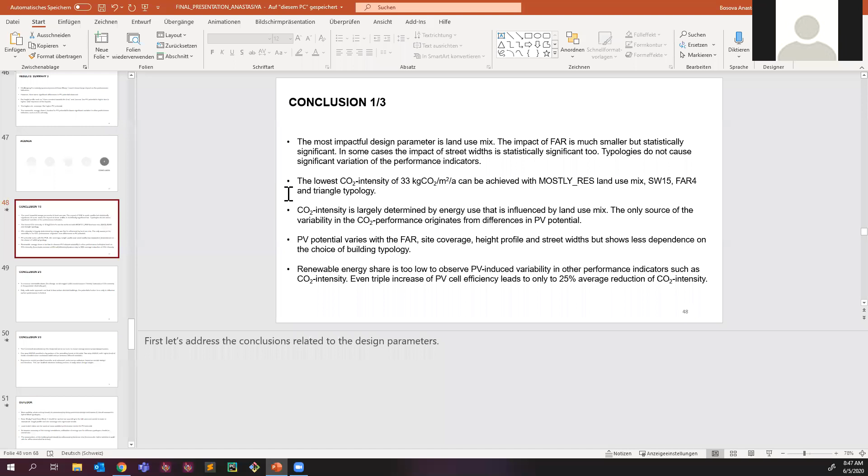Maybe I can follow up on that. Thank you very much, Anastasiya, that was very comprehensive. I'm very excited which jump you took after your midterm to this - you really switched gears. A very good introduction and motivation, very well explained. I like the setup of your studies, which I think are very comprehensive within the target you were aiming for. I like very much how you choose your methods and how you analyze this. I think on different levels there are very interesting insights.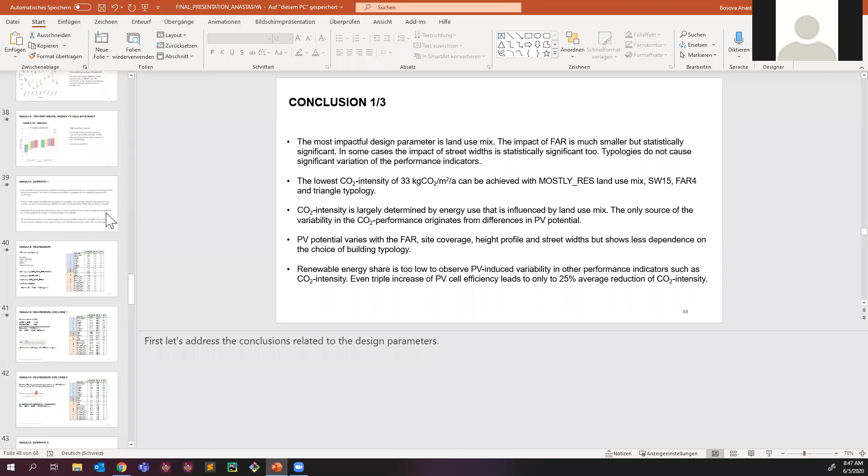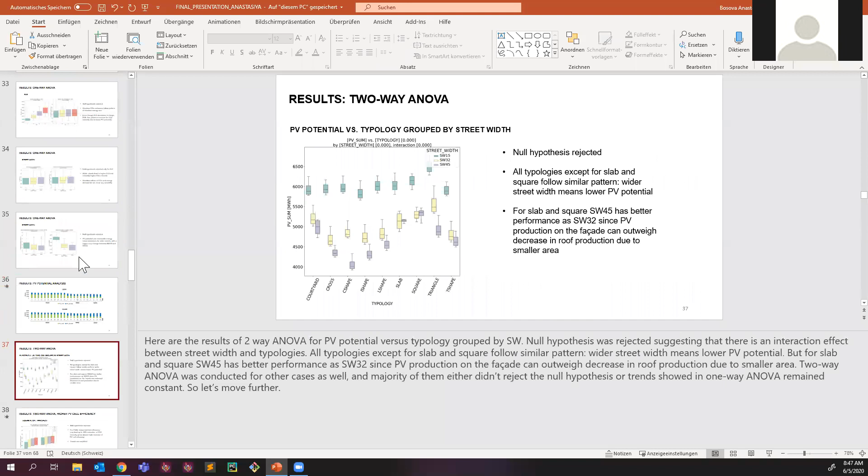For example, on the behavior - obviously some trends were to be expected, but some trends are not linear, and there's this interesting step in between, for example for FAR, I think that's a very interesting insight. Also obviously this coupling of parameters as you introduced, that's very interesting. I haven't seen that before, and I think that leads to very interesting insights and moves us away from just looking at single parameters. The second part where you show this very nicely is this mix - if you look at just a single parameter such as PV production, the changes are very much pronounced, but if you look at the total EUI, or the mix of different parameters, that gets kind of obfuscated or mixed in a sense, so it doesn't actually matter that much anymore.

So I think on a big level there's very interesting insights. A lot of my comments you already had in the outlook - I like your stab at looking into the projection of future technologies and technology development. I think you did a very good job with your study, and it has very interesting insights. Obviously, what you just mentioned holds true - if everything were decarbonized, we don't have to think about anything anymore. So that's very true. Yep.

But what is interesting, in a Swiss context you would have a grid with much less CO2 intensity, but on the other hand you would have very different boundary conditions, right? You would switch from a cooling case to a heating case. Certainly one extremely interesting thing would be to plant your study in a kind of European heating-dominated context and see how this would change. That would be almost like a dream come true in a sense, just flipping the context you have and seeing what would happen afterwards.

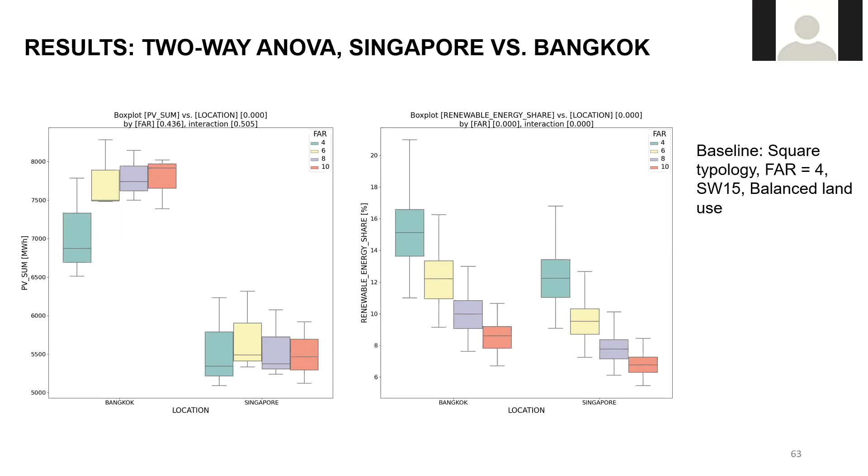And then you would actually have a kind of global index on responses to low carbon cities. The methodology you established is, I think, super comprehensive for these types of studies. As you mentioned, in the Swiss context you would have lower CO2, but much lower sun angles, so the seasonal distribution of solar radiation becomes much more dominant, especially with respect to the form factor of buildings and generation potential on facades versus roof. In Singapore, this is very much dominated by the roof.

But if you switch that to Zurich, then the facade exposure, especially in spring and fall, is something where you can show you actually generate much more electricity than on the rooftop, just because you have this area available. And then how much it is shaded, how much is exposed to the sun, becomes extremely relevant. So we should, in any case, try to - I don't know how much effort that is - but it would be fantastic to have this methodology applied to different contexts and learn from it, because I believe the results would be interesting nevertheless.

First hypothesis: this levels out again, right? You showed very nicely that different parameters kind of equal out if you look at the big picture. So the hypothesis could be that in our context it would also level out, because of lower CO2 intensity of the grid but different boundary conditions for heating and solar radiation. But then it's interesting that you might also have situations and locations where this doesn't level out - it just multiplies, in a sense, because you have different boundary conditions on a larger scale. That would be extremely interesting.

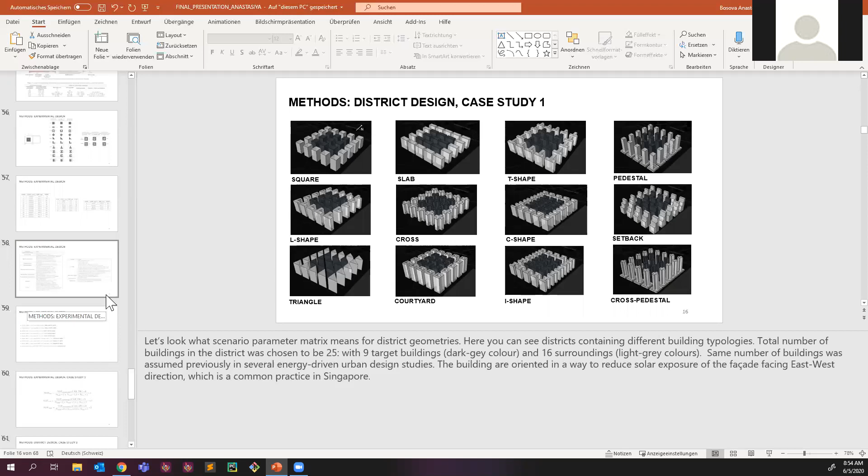Yeah, I think definitely it is the window to wall ratio, because it was kept at 40% for all the case studies to allow for PV panels on the facades. However, we have seen some results regarding energy use that were a bit unexpected, let's say. The change for different FAR is quite small, and in general the change of energy use was very small if we also compare the same typologies. So this raises the question of how far this window to wall ratio of 40 depicts the situation of different solar irradiation on the facades. Because while we could see it clearly for the PV panels, we couldn't really notice this effect with regard to, let's say, increasing cooling demand if the solar exposure of the facade increases.

I could make some assumptions in some cases that yes, this is the reason, but the magnitude of this effect was very low. So I suppose that if we increase window to wall ratio, for example for office users, for sure it can be increased, then we will see even more trade-offs between higher cooling energy demand of the building if the solar exposure of the facade increases, and then higher PV production, and how it balances each other out. So this interplay would be very interesting.

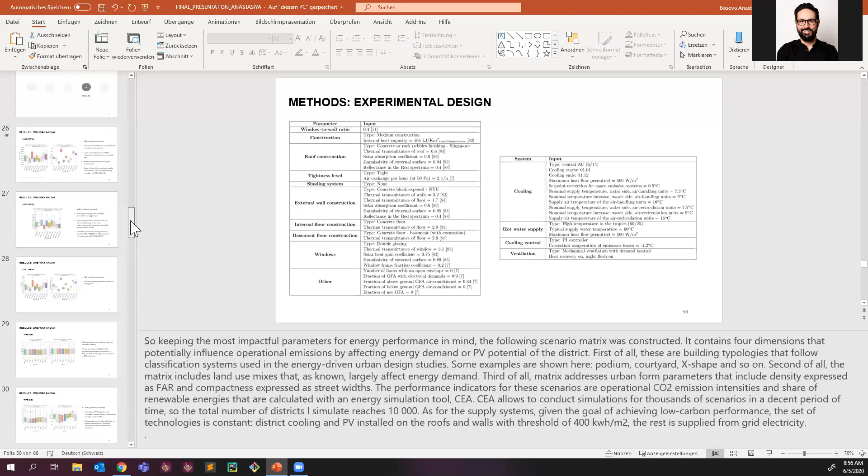Yes, I think just to connect to that, I believe what surprised me about these results, and the sensitivity to other parameters that were not part of the main analysis, was the idea of the PV efficiency. I mean, how disappointing is that we... Can you explain that a little closer? That was a little quick. Can you explain the effect, which is very, very interesting?

Yes, so we assume that the PV efficiency is almost 3 times bigger, and we wanted to see what is the impact on the results. If we take a comparison between FAR of 4, this green box plot, and compare the median of it against the CO2 intensity, there is only a reduction of 25% in CO2 intensity, given that we increase the PV cell efficiency 3 times. So this suggests that the energy demand is still too high and the PV potential is too low to have a larger effect. The trends and differences between these box plots are amplified, which is interesting, so we can zoom into it. But otherwise, we can't do much playing around with PV.

And it's looking at 44% efficiency, basically the maximum ever achieved in laboratory experiments, and very far from being in the market, I believe. We're talking maybe 10 to 15 years before that efficiency is in the market. Exactly, very... I mean, when we planned the experiment, I didn't expect it was so little.

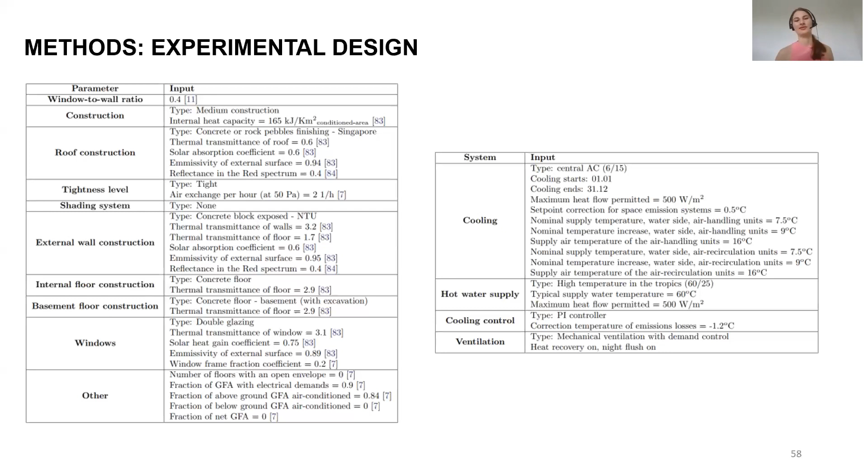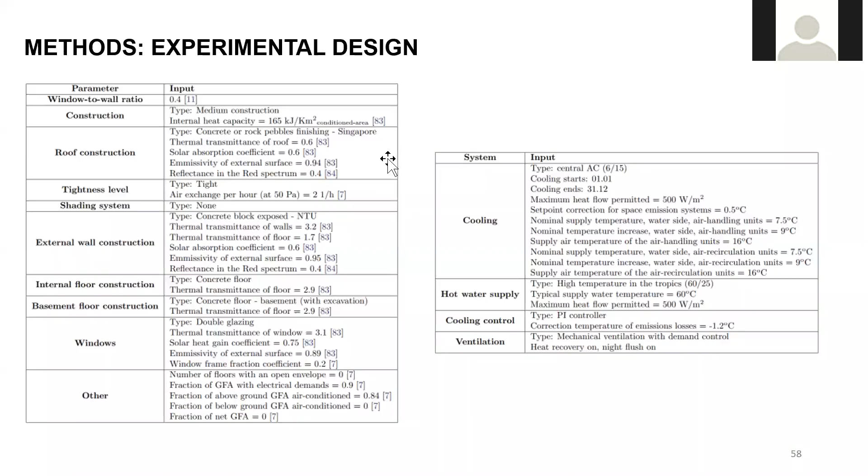All right, sorry. I'm very much looking forward to your report and going through in detail your very high amount of different results. Again, congratulations, I think it's a fantastic work. I'm very excited. Thank you. Very comprehensive. And thanks for enduring this difficult situation in Singapore, given the boundary conditions you had — I think it's even more impressive. I can congratulate you.

Thank you very much. Yes, the same from my side, Anastasiya. Great work, it's been a pleasure working together on this topic. Yeah, same — especially because it's also a step further from the research we did at Muses in the last four years. I think you did a really good job of putting everything together and enhancing it. And as Arno said, there are multiple possibilities to continue this research.

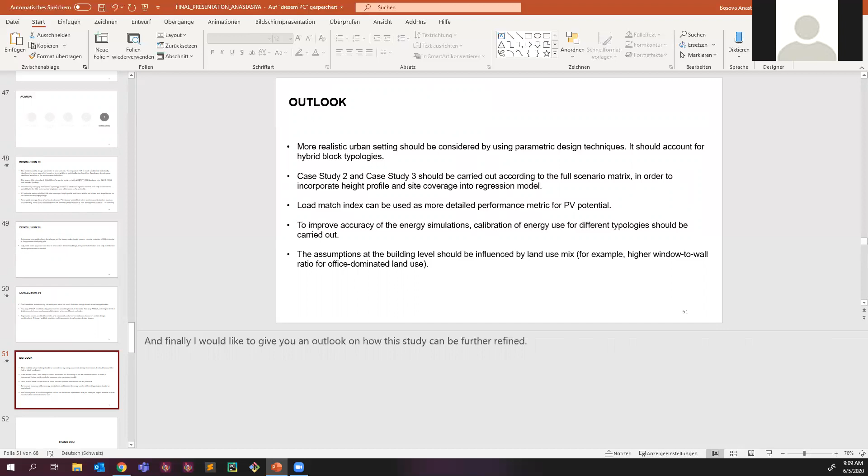The reason I'm mentioning that is because in the past I was working on similar problems, and we developed this black box optimization tool, where basically you have all your parameters as input, and then you link that to the simulator. Let's say you want to minimize CO2 emissions - this tool will allow you to find the solution in terms of mix, for example, of different types of buildings, that gives you hopefully a good value of CO2 without the need to try all the possible combinations.

So it's especially designed for problems where simulation takes a lot of time and you don't have enough computational power to run all the simulations. It's something that, hopefully after a few simulations, is already giving you a good result without the need to try everything. Maybe I can share with you later by email something more about that, because it may help you in that direction.

Yeah, thank you very much.

Maybe a comment to that - obviously optimization would be a solution to reduce that and run it automatically. But it's explicit that this is not an optimization, but a step process, because with optimization at the end you get one or a couple of well-performing solutions, but you actually don't learn that much on the way.

Yeah, it is more transparent in general, this kind of approach.